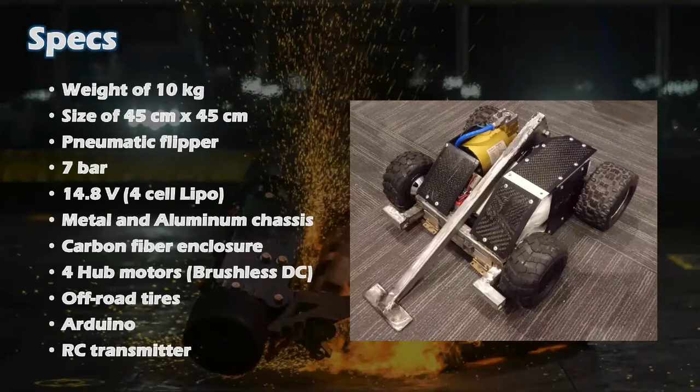Talking about the specs of this robot, the weight is 10 kilograms, following the rules and regulations in Sri Lanka. The size is also limited to 45 centimeters by 45 centimeters.

Then we used a pneumatic flipper with 7 bar of pressurized air. We used a 4-cell lithium polymer battery as our power source.

We use metal and aluminium to build the chassis. Then carbon fiber for the enclosure, actually carbon fiber and aluminium.

Other than brushed DC motors, we used hub motors, meaning brushless motors, for our drivetrain. Then we used off-road RC tires to get traction.

Simply, we use Arduino as our main controlling unit and an RC transmitter to control our battle robot.

This is the important part. The first step is to choose our components correctly.

We have rules and regulations that limit some specs of our components, and we have to maximize our performance within these boundaries. We have to carefully choose components that suit our battle robot.

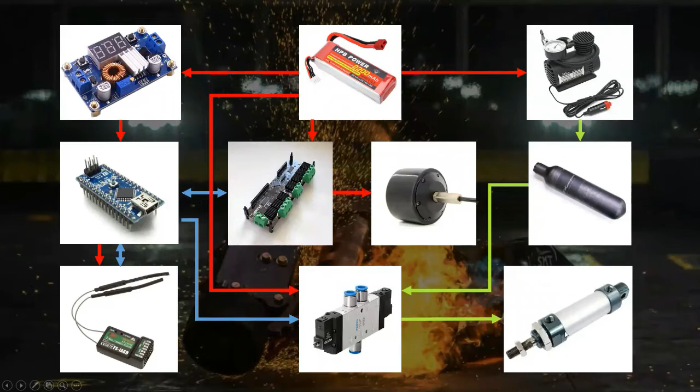So we have compressed air stored in the air container. If we do some flips, the air will be used up, so the number of flips we can get is limited by the air volume inside this air tank.

To overcome this problem, we add a small compressor inside our battle robot. So if the air pressure gets low in the air container, we can operate the air compressor and refill the container.

So we can get the number of flips that we want without limitation.

These are the basic electromechanical parts and connections in our battle robot. It's important to have this kind of overview because it makes it easy to design and develop our battle robot.

This is the first part: pick the right components and build this kind of overview about the electromechanical connections in our battle robot.

What is the next part? Actually, this is something like drawing, a conceptual design.

As a battle robot builder, we should know, at the end of the day, what we are going to build and how it looks. First, we don't need any CAD tool or graphic tool.

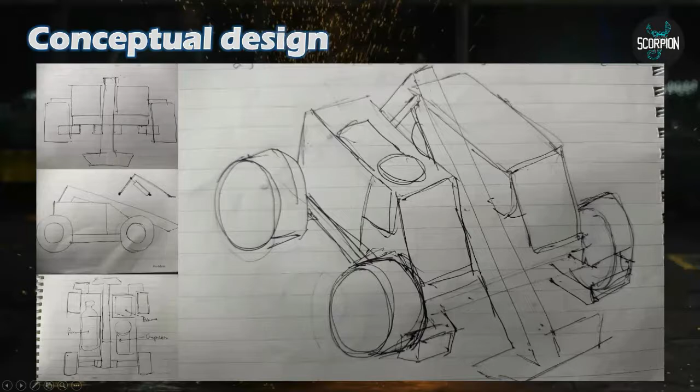Apart from the operation of the battle robot, we also have to think about its appearance. So conceptual design is a very important step of our battle robot building process, followed by 3D design with a CAD tool.

This step requires some knowledge about CAD tools. If you guys have that kind of knowledge, you can use SolidWorks, or there is a free, open source software called FreeCAD to develop this kind of 3D model of our battle robot.

I'm going to show the 3D model of my battle robot in SolidWorks. This is the 3D model that we have built. There are a lot of advantages of this step because we can accurately model our battle robot in this environment without building it. What are the advantages of that?

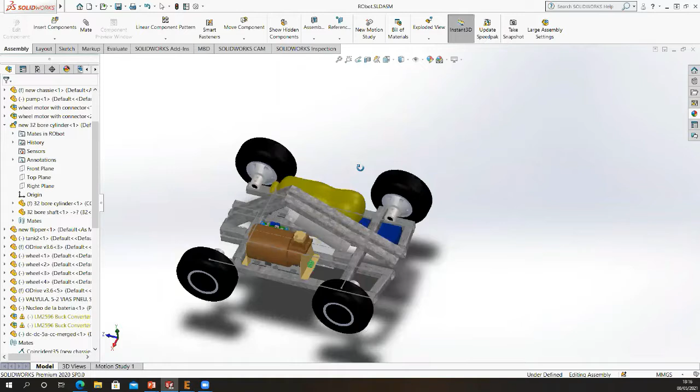The basic advantage is we can fit all the components within our boundaries, meaning within our size limitations. We have to build our robot within a 45 by 45 centimeter area, so initially we can mark that 45 by 45 centimeter square limit and place the components. That's a good advantage of this 3D modeling.

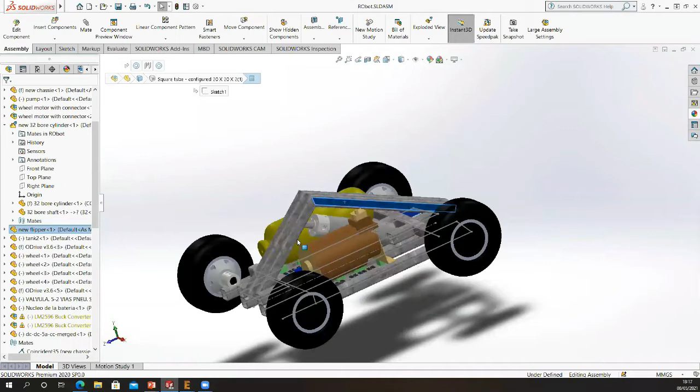Also, we can get an idea about how much material we need to build this robot. That means we can calculate the length of these metal bars, how much length we need to complete this design. That kind of measurement can be taken from these 3D models.

As the first step of the 3D model, I developed the base of the chassis. That means all the parts inside the battle robot are mounted on this base - hub motors, the compressor, air container, weapon, and other electronics are mounted on this base. So first I designed this base part.

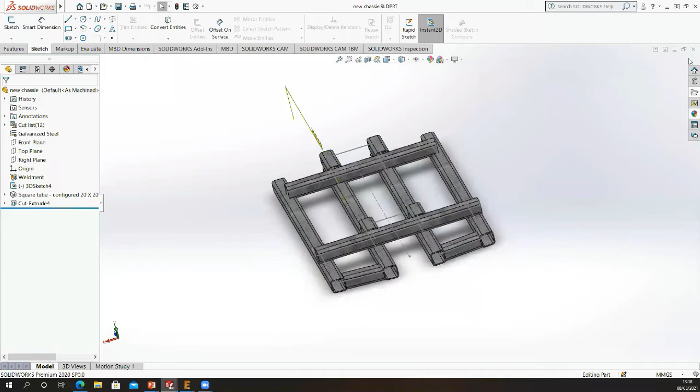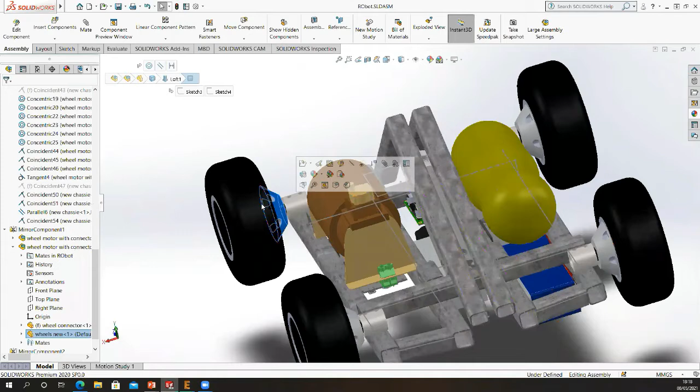Then I placed other components on top of this base part. You guys can think, do we need to build all these parts on our own? No, actually there are third-party sites where you can download some 3D models - models of motors, hub motors, wheels, compressors, some standard electronics circuits, and batteries can be directly downloaded from those third-party websites.

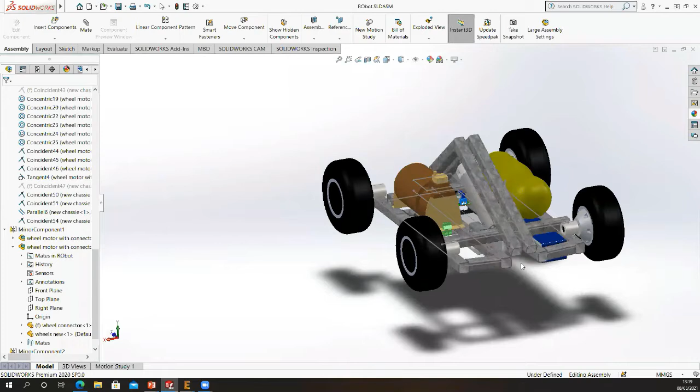In here you guys can see I placed all my basic components on this 3D model. Then I can get a good idea about how to plan the enclosure of this battle robot. Without this kind of 3D model, we'd have to think about the enclosure after physically fitting all these components. But the advantage of 3D modeling is we can plan that enclosure in this environment and virtually see how our battle robot is going to look with these components.

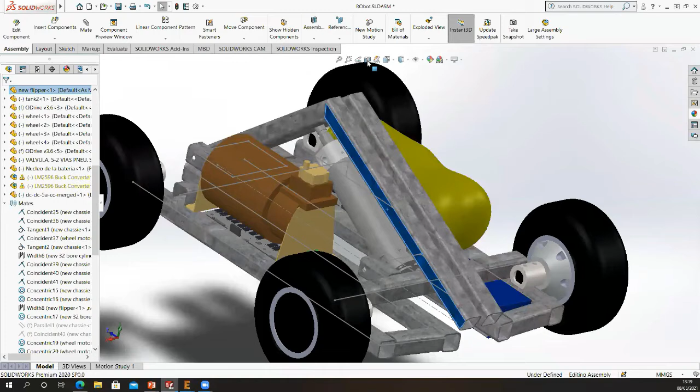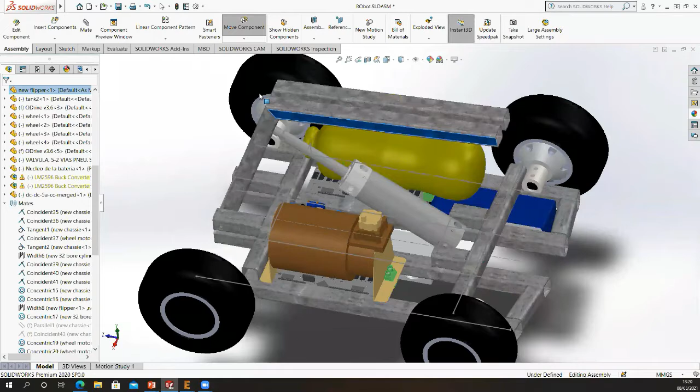Also, the other important part is we can move components like this. This is actually not the completed weapon - there's some part in front of it, but that's not very important. Then we can move our weapon and see if any components collide with my weapon's path. That's also very important, because after physically placing all these components, if the weapon collides with some critical parts when moving, it's not going to be good. So we can initially check if any component collides with my weapon. That's a very good advantage of this 3D modeling.

I think you guys will get the importance of this 3D modeling. You can learn about this 3D modeling yourself - there are a lot of tutorials, and we can also help you learn these kinds of tools. Okay, this is about the 3D modeling and its importance. What is the next step?

Next step is we have to check that our weapon system is working correctly. That means we can choose any weapon you like - if it's a spinning drum, a vertical spinner, a horizontal spinner, a lifter, or it could be a flamethrower, but we can't use flamethrowers here. As I mentioned in the previous session, in Sri Lanka the most effective weapons are lifters and flippers, given the limitation of weight and size.

So we decided to go with the pneumatic flipper, and we tested the operation of that pneumatic flipper. Initially we didn't use 7 bar, we used only 4 bar. We thought it would give a good result. This was tested with 4 bar, but it's actually not enough, so we decided to increase our pressure.

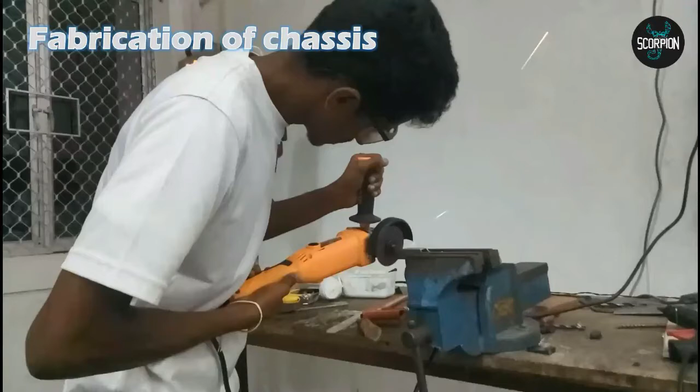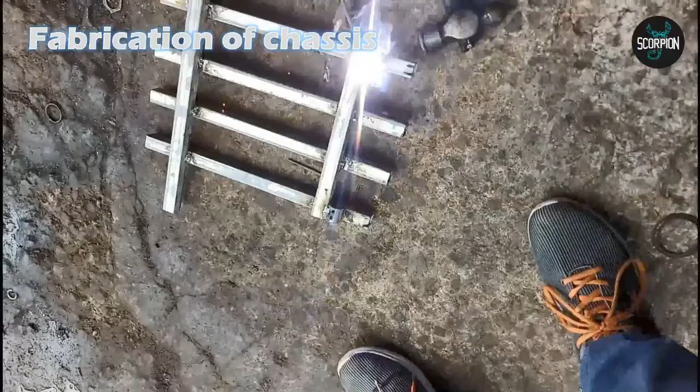Then, other thing is the fabrication of the chassis. Next thing is fabrication of our chassis. We use metal box bars to build our chassis, because we are using a pneumatic flipper, so a lot of impacts can be coming out from the flipper, so we have to build the robot very durably.

So we use metal box bars and cut those metal box bars to the accurate length. The length is taken from the 3D model, that is the importance of the 3D model. We can get the correct length measurements and correct placing of all components. We take those measurements from the 3D model, then build the chassis. We have to use cutting tools, welding tools, and drilling tools to build the chassis. That depends on the material and the method of fabrication of the chassis.

What are the tools we require in this step? I'm going to talk about the tools that you need for the fabrication of your chassis. Basically, all robot builders tend to use aluminum or metal to build their chassis. That's a good idea, because we have to make a durable robot that the opponent cannot damage.

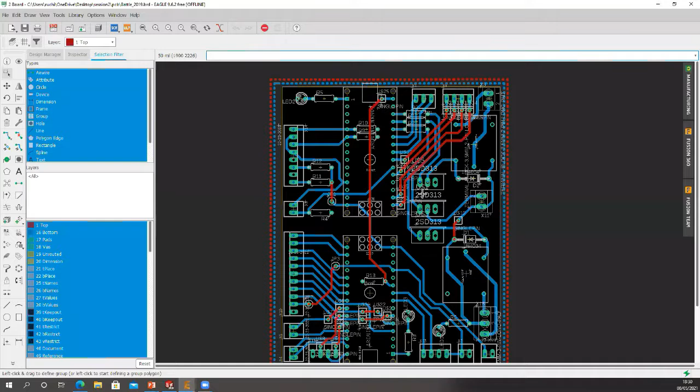This is the PCB design we have done. We use the EagleCAD designing software. There are a lot of PCB design softwares around the world. In EagleCAD there is also a free version, but it has certain limits. But there is KiCad, that's a totally free edition. Then there are a lot of PCB editing tools like Altium, OrCAD, EasyEDA, something like that.

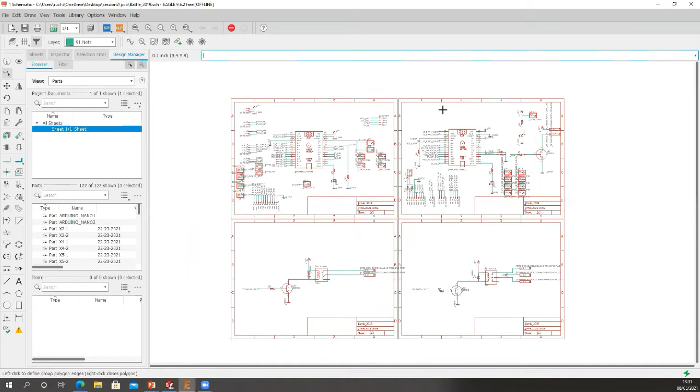You can use any software tool. The basic idea of the software tools is the same on every platform, and you can practice them and design this kind of PCB to use as our main control unit. And you can use this PCB in future for other robots also.

Then you can fabricate this PCB with the etching process at home with your hands-on experience, or you can use JLC PCB or PCB Way. There are a lot of PCB manufacturers in China. It's not very expensive - you can get their service to have a good PCB with your battle robot. That's about the PCB design.

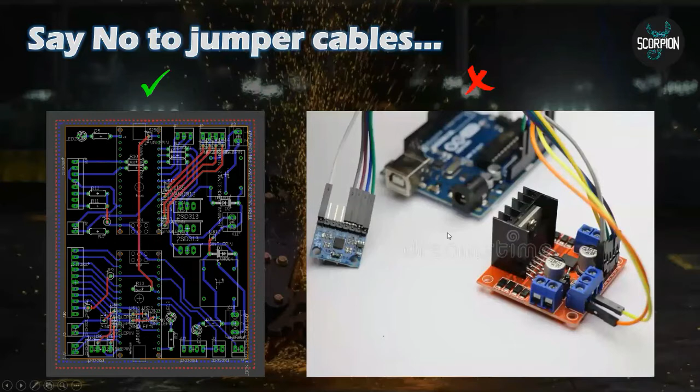I mentioned that previously - this also can be done like this, meaning we can just connect jumpers with Arduino to the motor controller or any other electrical device. But the problem is, if our robot gets a huge impact from another robot's weapon, sometimes this connection can be lost, because these jumpers haven't any lock-in mechanism. But with our PCB, we can include lock-in connectors, so the connection is good. Whether we had a huge impact or not, the connection is secure. This is the importance of having a PCB like that.

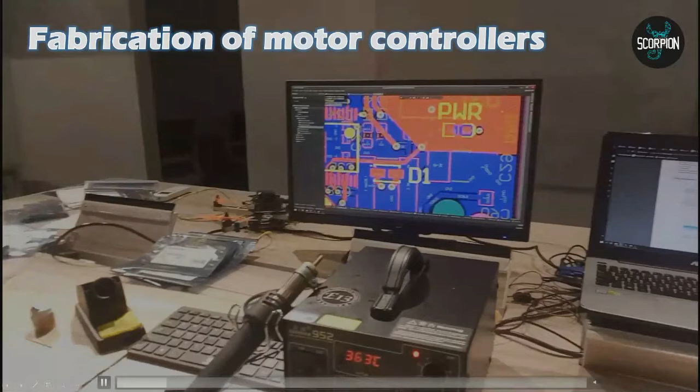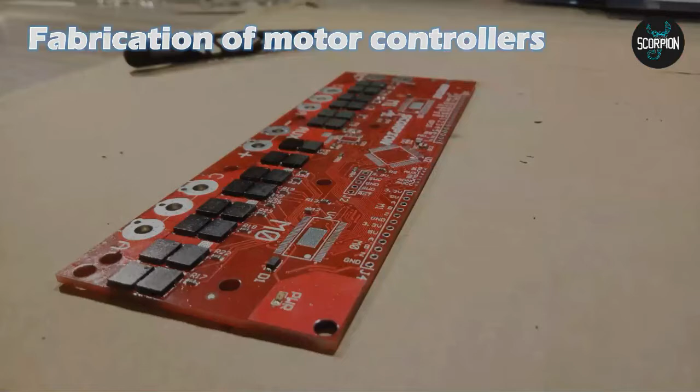This is about the main controller PCB. Then actually in this design we fabricate the motor controller also. Actually, we can buy a motor controller from a shop and use it with our battle robot, but what we have done here is get an open source design and edit it in a certain way to fit our requirements. Then we sent the design to China, fabricated it, and soldered it here with our tools.

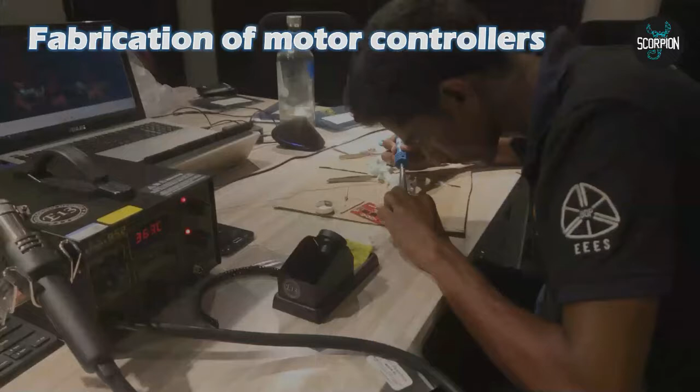Actually, this is a good experience - soldering a PCB is a good experience. It needs patience and a lot of things. Then this is that PCB. Actually, this is a dual motor drive ESC. This has encoder feedback.

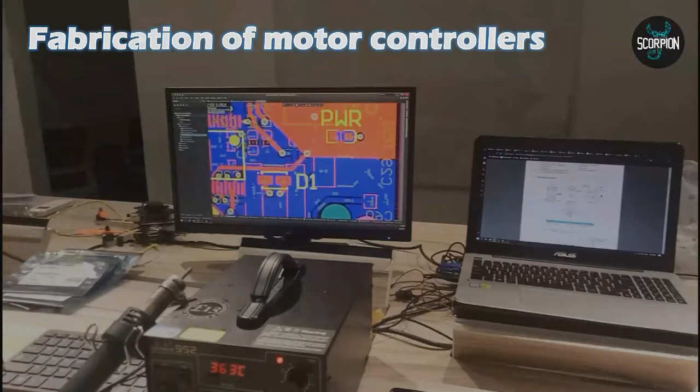As I mentioned before, we used hub motors and not DC brushed motors. So to maintain the torque and drive correctly, we need to get the encoder reading as well. Because of that, we use this closed loop motor controller. This is the fabrication of that motor controller in our labs.

But don't think you guys also need to fabricate the motor controller on your own - that's not a much needed step. You can just buy a motor controller and use it with your battle robot. In Sri Lanka also there are a lot of online stores now available, so you can just order the motor drivers and use them.

This is the testing of the motor controllers. Since these are soldered with our hands, we have to test it. We send some USB commands and test our hub motors with this motor controller. Actually, it's successful.

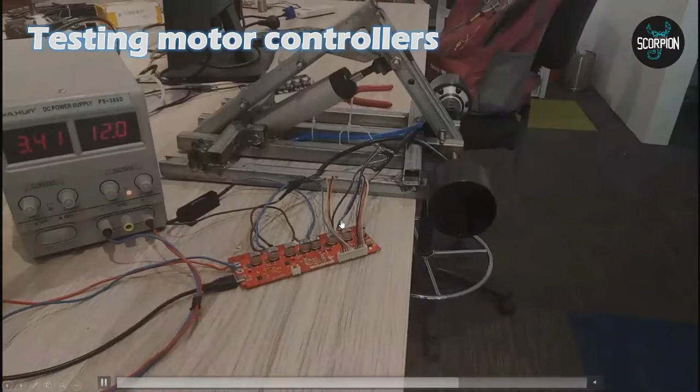And I have to share some experience about these hub motor controllers. Actually, as I mentioned before, to control these hub motors, these motor controllers take the encoder values of the motor. The motor manufacturers place some encoders inside the motor and give some wires to connect the motor controller. So there can be some problem with noise in these encoder lines. This happens a lot. In a lot of forums, a lot of developers are saying that encoder noise happens there.

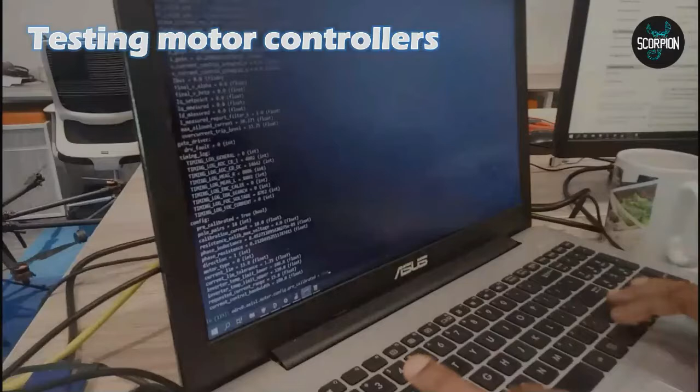If you guys also face that kind of problem, you can simply add some picofarad range capacitors between each encoder line and the ground. That will solve the encoder noise problems in these kinds of closed loop motor drivers. This is a practical scenario, because the encoder wires are coming together with the high power motor wires, so there can be some noise added to the encoder line, so we have to filter it out. That's a practical scenario we have experienced in this design.

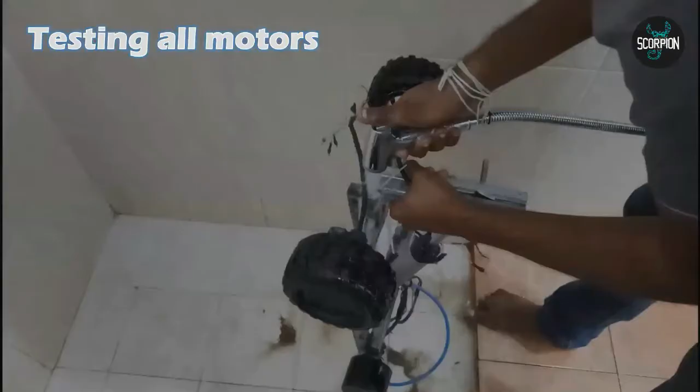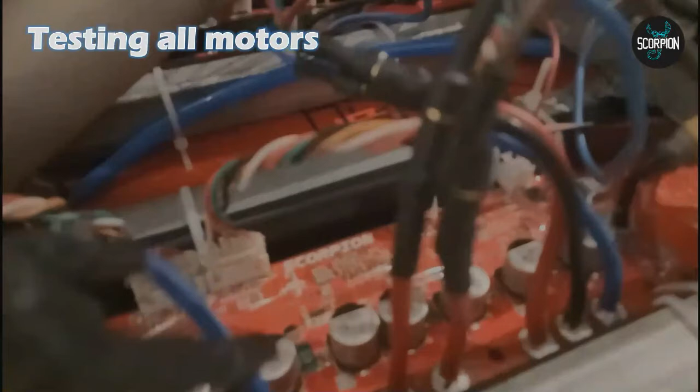Then we tested all motors with the motor drivers we built. Actually, initially you guys can see the acceleration. We couldn't control the robot well, so it's out of control and going through a mud area. The mud is all over the robot. Then we washed the robot to remove the mud. That's the importance of these hub motors. Initially, it can get huge acceleration. So your driving skills should be at a high level to control this kind of motor.

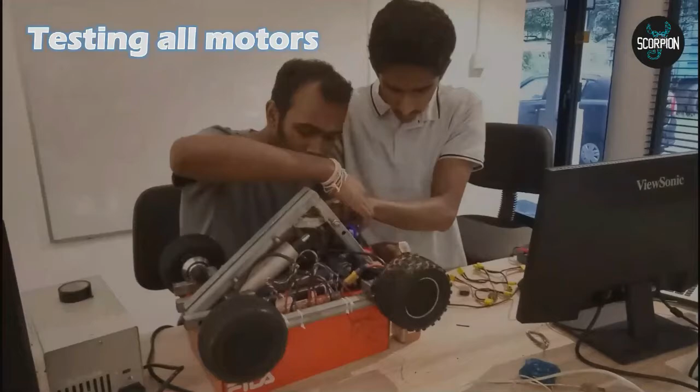This is also a test of our motors with our motor driver. You can see the acceleration. Actually, these motors don't have any gearbox, but with the closed loop control of the motor driver, this can get huge acceleration and huge torque. You can see this is not a fast forward video. You can see the acceleration of the robot.

Actually, in the competition also, a lot of participants cannot even think about that acceleration. Just start the countdown, and within a second, our robot is near the opponent robot. So that's the main advantage of these brushless motors. They can get a huge acceleration.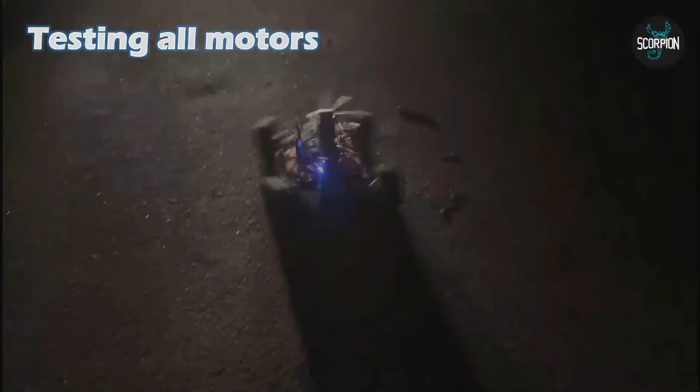These are some outdoor tests. Actually, the hub motors initially came with a very hard rubber covering, so it's not good for traction. So we got RC tires, removed the rims of the RC tires, and connected the hub motors with these RC tires. That's about the motor testing.

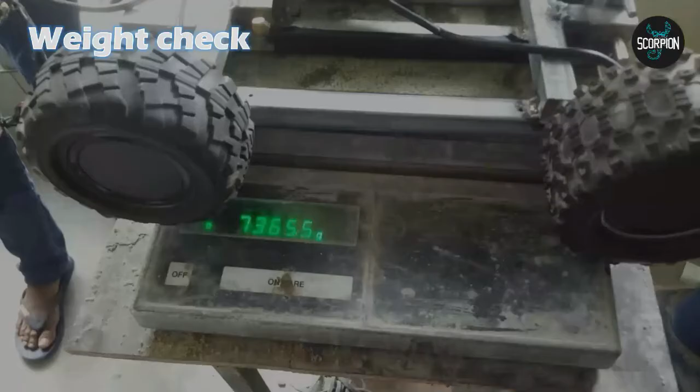Then the weight check. This is a very important thing because we have to limit our robot to 10 kilograms. That's the weight limitation of our robot. So we measured the weight of every part of our robot: the chassis, motors, motor drivers, electronic parts, solenoid valve, piston, weapon, every part. Then finally, the total was much higher than 10 kilograms. If we went with this weight, our robot would definitely be disqualified. So we had to reduce some weight. So we removed some metal parts and made some changes to our robot chassis and robot weapon.

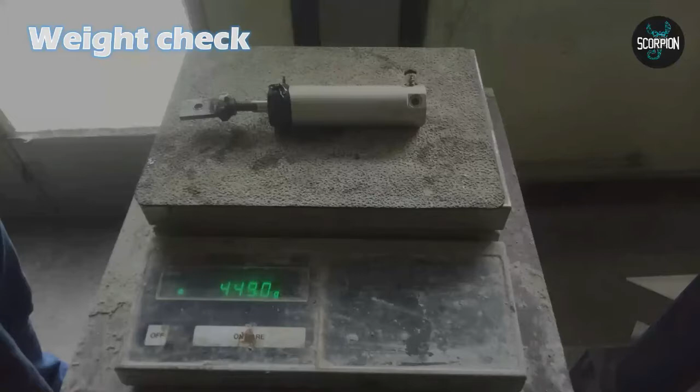Actually, that is the next part we have done. This is a very important part, the weight check. If you are building a battle robot, at every stage you have to measure the weight of your battle robot. If the weight is higher than the limit, you have to remove some parts of your robot. So think about that.

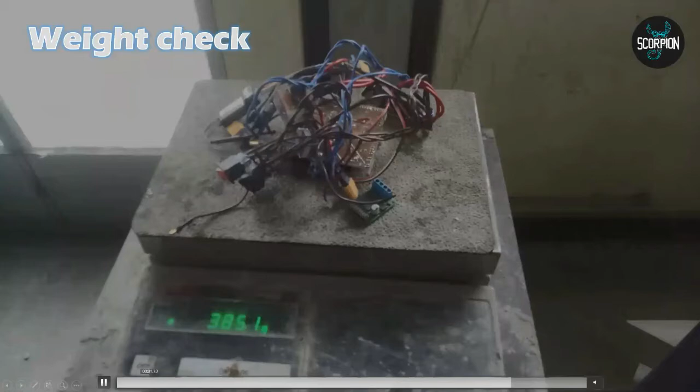Then the next part is the adjustment of the chassis and the weapon to make the battle robot lighter. So we removed some metal bars here and added aluminium bars for those parts. So finally, we were able to make it within 10 kilograms. And for the weapon also, initially we used 2 bars. Then we decided to go with 1 bar and a long weapon. So that also reduced some weight.

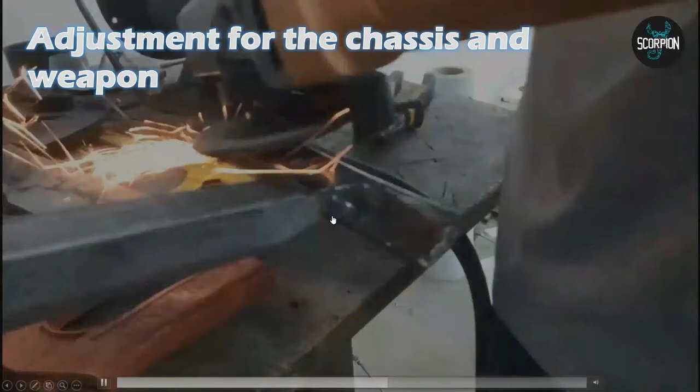Here also we used a welding shield to protect our eyes when we are welding. This is our weapon tip. We made it very sharp to get underneath the opponent robot. We need very little ground clearance to get underneath the opponent robot. So we sharpened this weapon tip as much as we can.

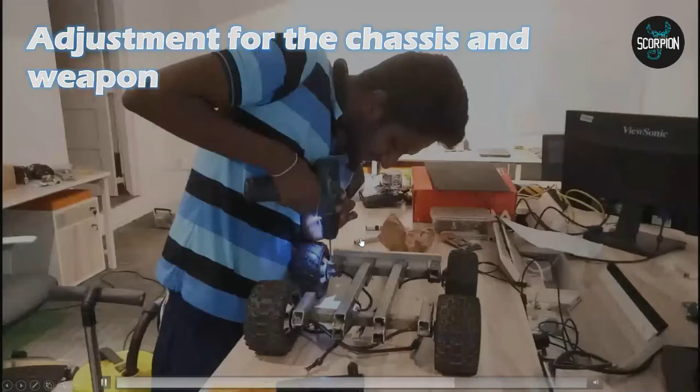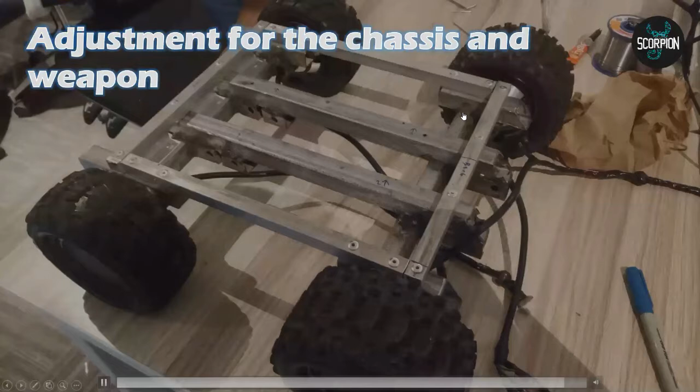Then, as I said, we removed some metal bars and added some aluminium bars in place of those metal bars. These are the aluminium frames that we added instead of the metal bars. Those are the adjustments we have done.

Then we measured all parts of our battle robot. It came to 9.149 kilograms. This is actually without the enclosure. So we have very limited weight to allocate to the enclosure. Because of that, we moved to carbon fiber, because carbon fiber is a very light and hard material. So we moved to carbon fiber because of this weight limitation.

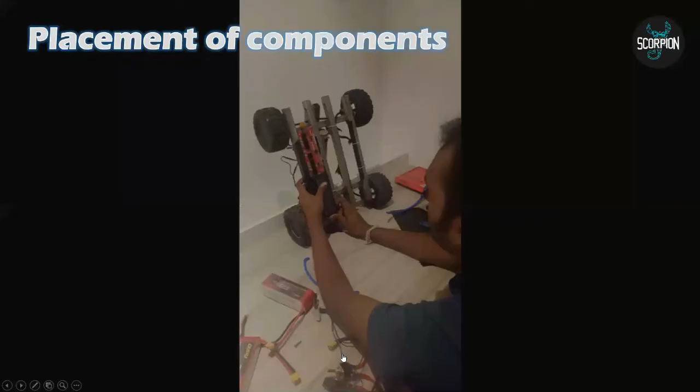Then the next step is the placement of our components. First we have placed the motors and wheels. Then we place the weapon. This is the air container. It has to be protected very well, because it contains 7 bar pressurized air, compressed air.

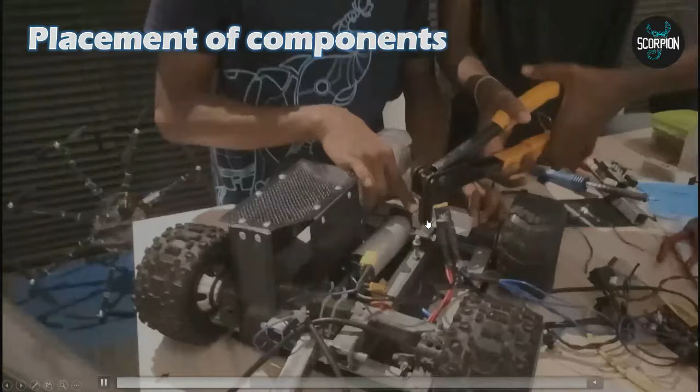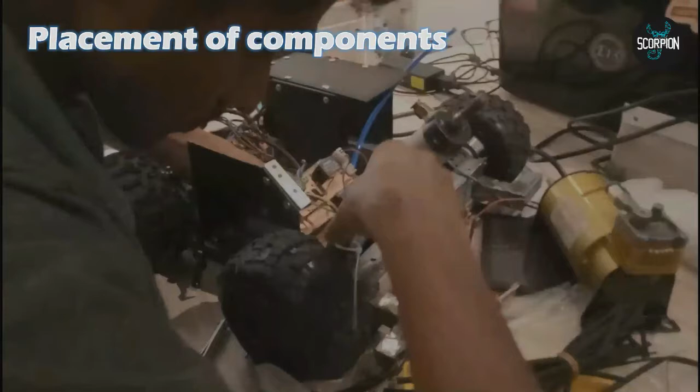Then these are our pneumatic air lines, so these also have to be placed nicely. In this step, the neatness of your work is very important, because in a battle robot there are signal lines, there are power wires, and in our design there are pneumatic air lines. If you place those lines, components and wires very neatly, you can easily find out if there is any error, bug or damaged component. So in this step, your neatness of work is very important.

This is the main controller PCB placement. This PCB was made here with the PCB milling machine. This is the placement of the main controller. Then the enclosure; this enclosure we made with carbon fiber.

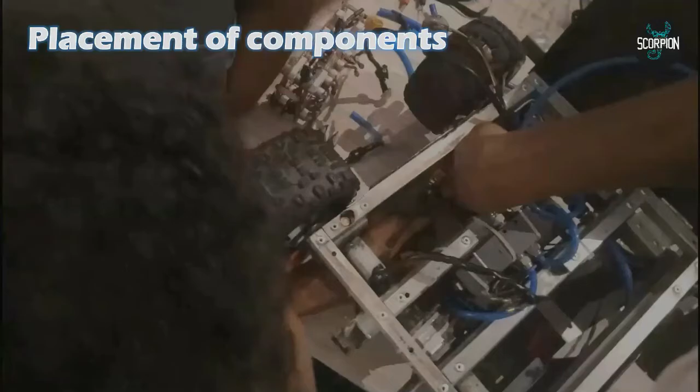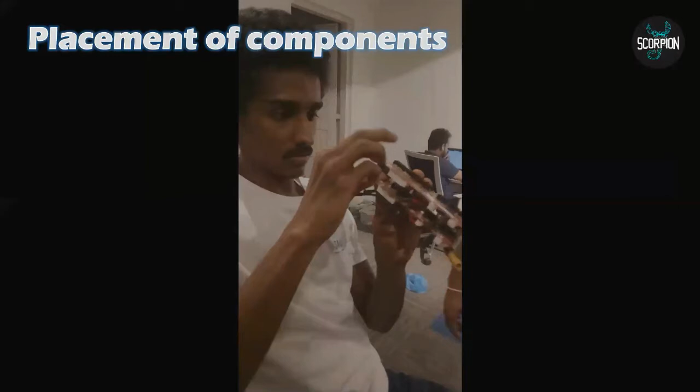When talking about the enclosure, you have to think about 2 things. First, you have to protect your critical components with the enclosure. That's the main idea of the enclosure. The other thing is you have to be able to remove any part of the enclosure easily to access the electronic or mechanical components inside the battle bot. Why? Because if some component gets damaged during battle time, we have to replace it, so we have to be able to remove part of our enclosure easily and access that component.

Then we can replace that component with a new one. That should be kept in mind also. For that purpose, we used this kind of enclosure, where the bottom side can easily open. Then we can access any electronic or mechanical part through this open area. That's about the enclosure and placement of the robot. Then the electrical wiring, which is also a part of placing the components.

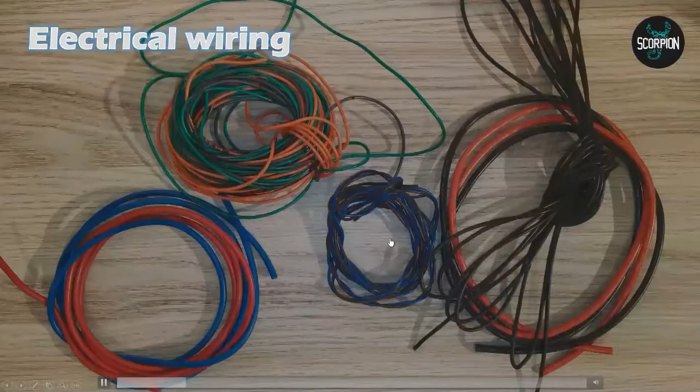Here also, as I mentioned before, you have to choose correct wires and solder them properly, because in battle time we get a lot of hits and impacts from other robots. So our soldering joints have to be perfect. These are the wires that we can see in the market: very cheap twisted wires, silicon wires, and

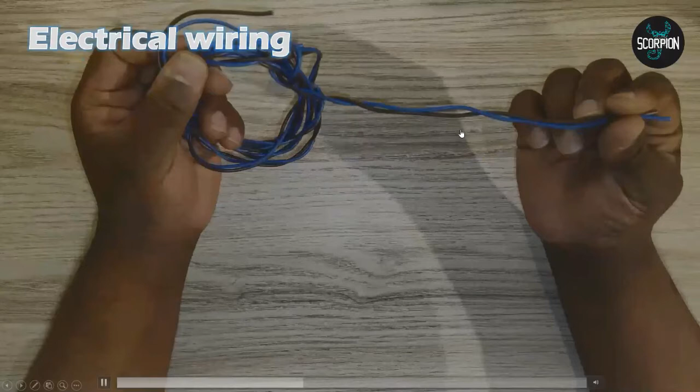auto wires. These twisted wires are okay for transmitting very low power, but using them to power up our motors, motor drivers or weapon is not a good idea, because this wire has a very limited number of cores, so we can transmit only very limited current.

But with these auto wires, we can select many sizes and many colors, so we can use wire with a large number of cores to transmit power to our motors or weapons. So it's good to use these auto wires rather than the cheap twisted wires shown previously.

We can also use silicon wires, which are available in many sizes, but the problem is in Sri Lanka we cannot find every size that we want. So a good solution is auto wires, because they're made for the automobile industry. They're very heat resistant, so they're good for transmitting power in our battle robot design.

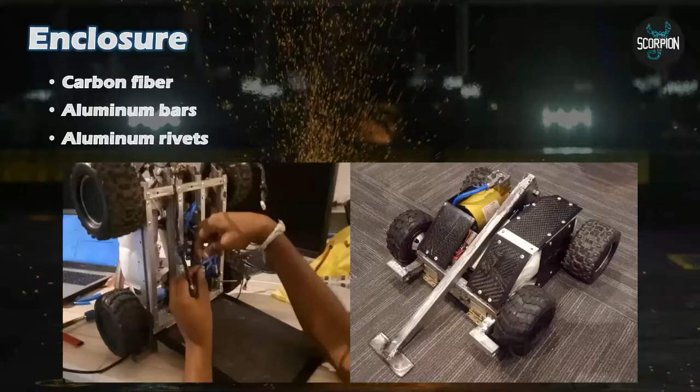This is the enclosure. As I mentioned before, we used carbon fiber, aluminum bars and aluminum rivets to make the enclosure. These are carbon plates, around 2 millimeters thick, not very thick, but very hard. They protect our critical and electronic components, which is the basic need of the enclosure.

And as I mentioned before, the bottom part of our enclosure is designed to be easily removed to access every electronic and mechanical component inside the battle robot. These are the main concerns you have to think about when building the enclosure. If you can't find carbon fiber, you can simply use aluminum plates with different thicknesses.

It's also good because aluminum is also a lightweight material, and its hardness is at a considerable level, so you can also use aluminum. So, why are we not using a heavy metal for this enclosure?

Because we have to allocate our weight more to our weapon, chassis and drivetrain, because those are the main parts. Your robot has to move quickly, the robot's drivetrain has to have a lot of torque, and your weapon has to be very dangerous. So you have to allocate every weight for those systems. So it's good to have lightweight material for the enclosure design because of that.

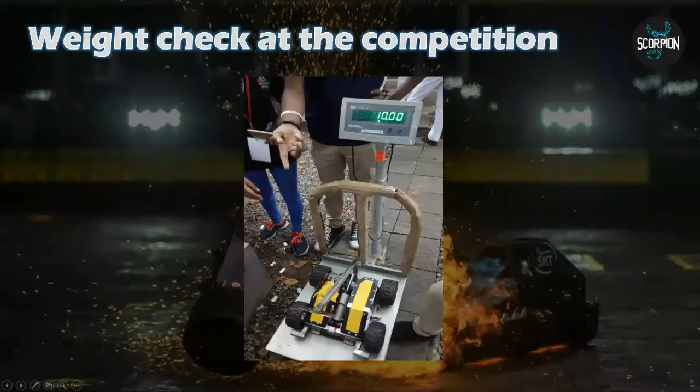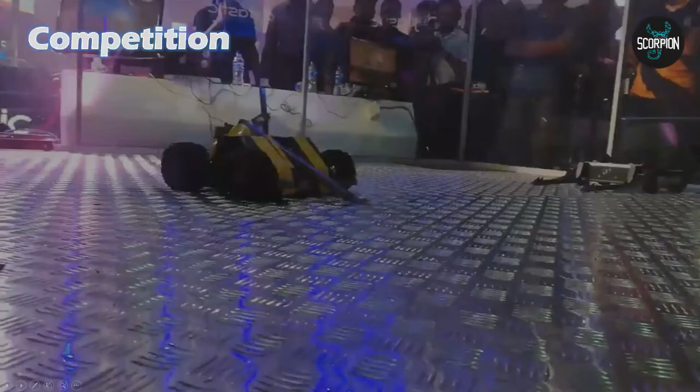Actually, this is the competition day. It's tied to the 10 kilograms, so it's okay. We qualified our robot, and this is the result of this pneumatic flipper. It actually worked very well. The robot is fast. The flipping is fast. This is the first time pneumatic flippers and hub motors were used in a drivetrain. So we made a difference, and it worked very well.

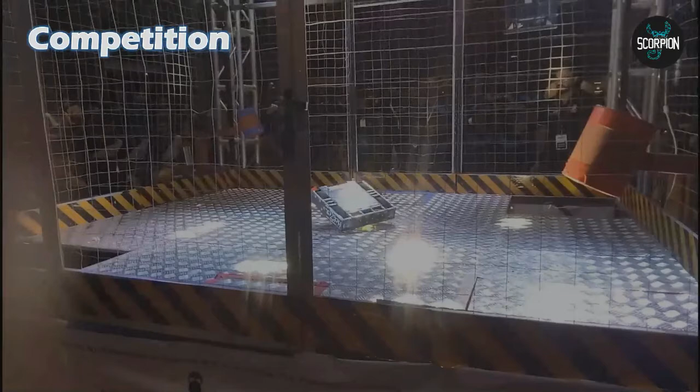You guys should also think about doing a different thing. Using brushed motors for the drivetrain is okay, because we can easily find brushed motors on the market. But try to add a new weapon, or try to use a combination of weapons. A lot of bot builders are going to build just a wedge bot. That means there is no active weapon, just a battle robot with a ramp. The idea is to push the opponent robot and win the match. But it's not an interesting way to win a match.

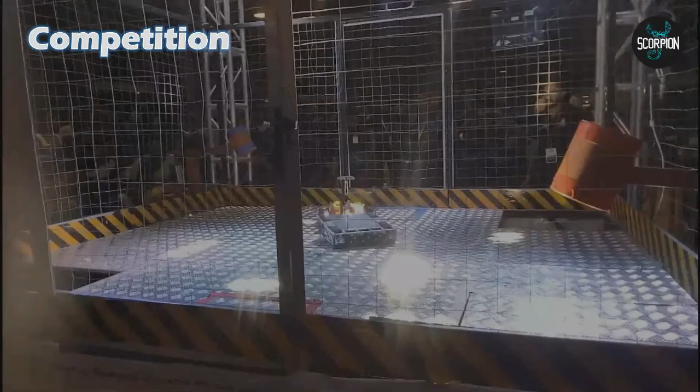So you can try a new weapon in every battle bot competition and see whether it's working or not, and make improvements to the weapon and drivetrain. Then this robot building task actually gets very interesting.

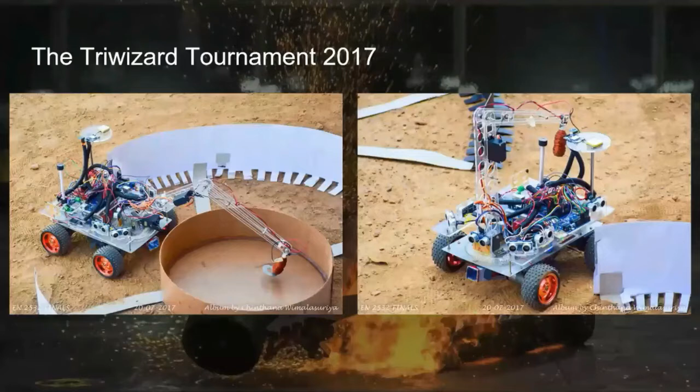Before going into the BattleBot implementation sessions, let me give you some insights into the other robotics competitions happening in Sri Lanka, so you can have knowledge about them, apply to those, compete and have fun. I have chosen 5 different robotics competitions that I competed in during my university life. This is the first one, my first robotics experience.

The Triwizard Tournament 2017, organized by the Department of Electronics and Telecommunication Engineering, University of Moratuwa. It's kind of an interdepartment robotics competition. The task was held outside. The task was to navigate from an initial location to the destination, placed 50 meters away, using GPS. There were two cardboard walls there, one white and the other black.

There's a color sensor placed in front of the robot, as you can see in this picture, which differentiates the black and white walls. Then the robot had to follow the wall to find this cutout to enter the area where the metal ring is placed inside this basket. Once inside, the robot could use this manipulator with an electromagnetic end effector to grab the metal ring. So that was the task.

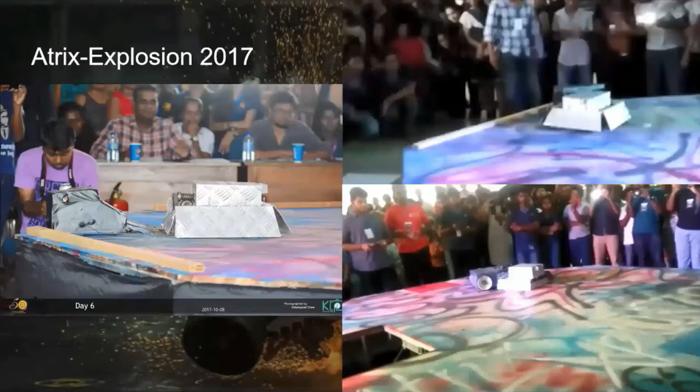And this kind of open arena BattleBot competition is really dangerous. Nowadays, all BattleBot arenas are covered with metal meshes, or at least have a fence to avoid harms for the drivers and the viewers as well.

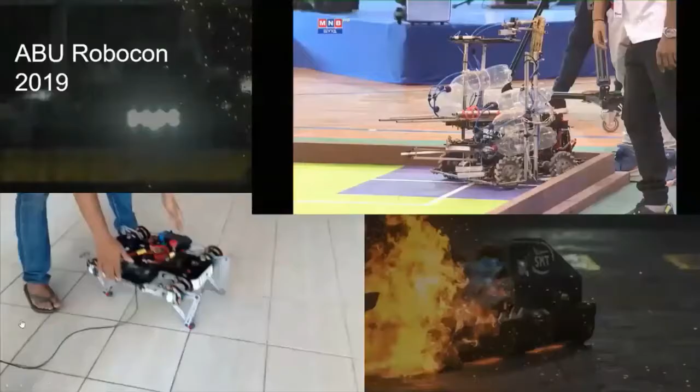ABU Robocon 2019 was held in Mongolia. I got the opportunity to participate for Sri Lanka in an international event. For the competition, we had to build two robots. The first one is a manual wheeled robot, and the second one was an autonomous legged robot. For the autonomous legged robot, we used BLDC motors, brushless DC motors, as you can see in this video.

The task was to carry an object which has some message in it called Gerege. As you can see in this video, this is the message written Gerege that I was talking about. And the manual robot has to pass it to the legged autonomous robot. Afterwards, the manual robot had to shoot some objects called Shagai. The way the Shagai are shot gives points to our team. After collecting enough points, the legged robot can start climbing the ramp. The first team to finish the whole task is named as the winner of each battle.

In this competition, we couldn't win even a single game because of the technical difficulties we faced on the actual competition day. Also, I wasn't able to visit Mongolia to participate in this event, but I was working in the team at the time.

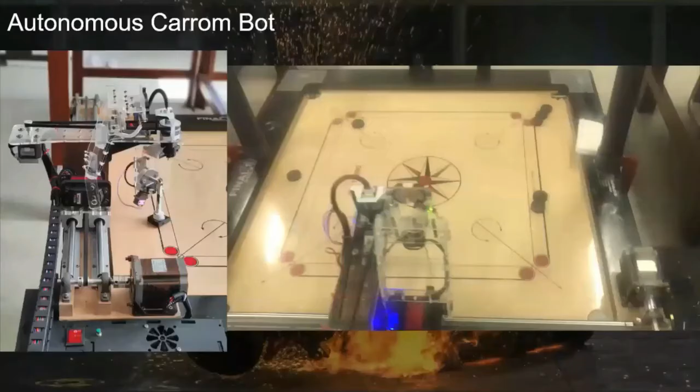Okay, guys. What I have to demonstrate next is the most interesting project that I have ever done in robotics. This autonomous carrom bot we built as a team of 4 as our final year project. It plays a series of best possible shots to win a game. The manipulator shown in this picture has 4 degree of freedom motions, so it can place the disc by itself and play 360 shots as well. Thumbing shots are available in carrom, so the robot can play those kinds of shots as well.

Also, we have programmed this robot to play against a human opponent. We played several games with human opponents as well. In this video, you can see how the robot is capable of executing a series of shots in order to pocket all the available pieces on the board. It can even decluster clusters on the board and play the shots according to those clusters as well.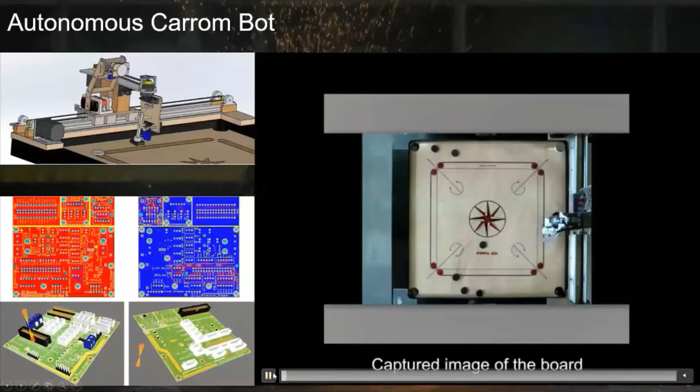So guys, let me demonstrate how this robot works. There is a camera placed on top of the board, so the camera can capture this image of the board. Actually, this image is captured using that camera. So this is the input to the system. This is how the system shows the board. And after running some image processing techniques, we can extract the locations of pieces and edges of the board and pockets as well. There we define a 2D XY coordinate plane on top of the board, so we can calculate XY coordinates of each piece and pockets as well.

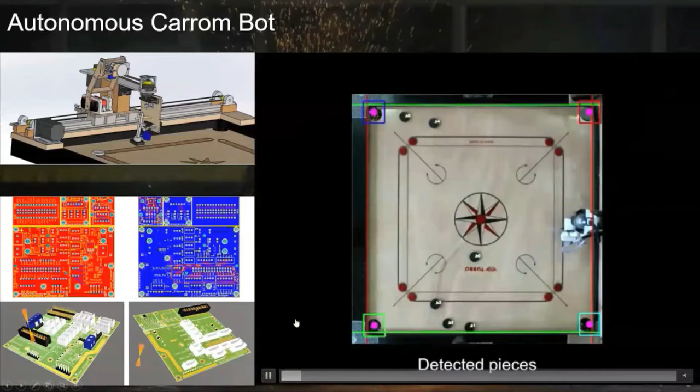For the implementation of this robot, this is the 3D model of the robot, and these are some of the PCBs that we made during this project. And we won second place in the IAS Industry Application Society IEEE International Robotics Competition in 2020, held in

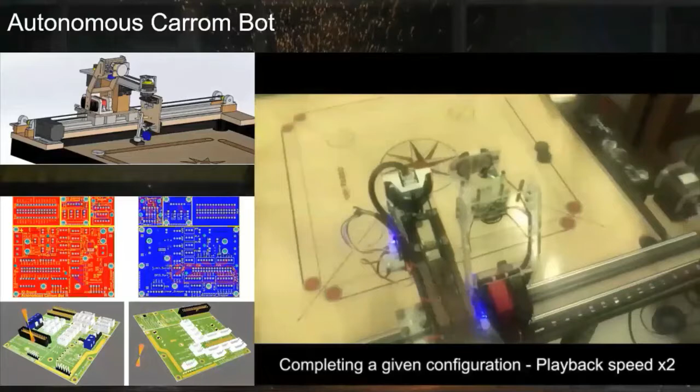So the reason behind showing this project is for you guys to understand what are the possible areas that we can address using the knowledge that we have gathered from this series of sessions. After following this series of sessions, you will be able to know what applications we can

address using robotics, machine learning, AI, AR, those kind of things. So this is not only limited to BattleBot. You can use this knowledge to solve any robotics related problem you're facing in your day-to-day lives.

During the last session, we promised you that we will talk about best practices to maintain while building a BattleBot. So let's start with protection. When it comes to protection, there are several major components that we have to intensively think about. Those are the battery, wheels, motors, the control circuit we are using, the RF receiver, and finally the cutoff or kill switch.

Starting from the battery, if you guys can remember the last session, we summarized that in most cases we are using either a lithium polymer or a lithium ion battery as our main power source when building a BattleBot. So those two types of batteries need intensive care when handling.

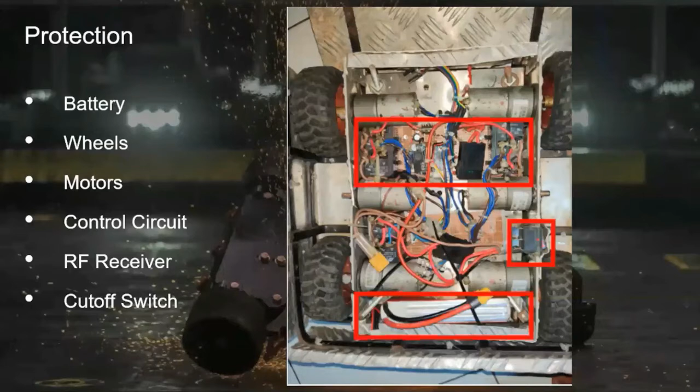While providing this high current, the battery may get heated. To make sure this doesn't cause harm, it is better if you can mount the battery near the enclosure, so the battery can dissipate its heat to the metal enclosure, and the temperature rise may not harm the battery.

The most important part when it comes to batteries is to avoid physical damage. If a weapon or a sharp object hits the battery, a lithium polymer or lithium ion battery can explode or catch fire. So it is better to avoid such scenarios.

As you can see in this figure, these are the fuses we used to avoid overcurrent. And here is our lithium polymer battery. As you can see, the battery is fully covered with a metal enclosure, with two layers of metal enclosures covering it, so no harm can be done to the battery by the opponent's weapon. Those are the main points regarding protection of the battery.

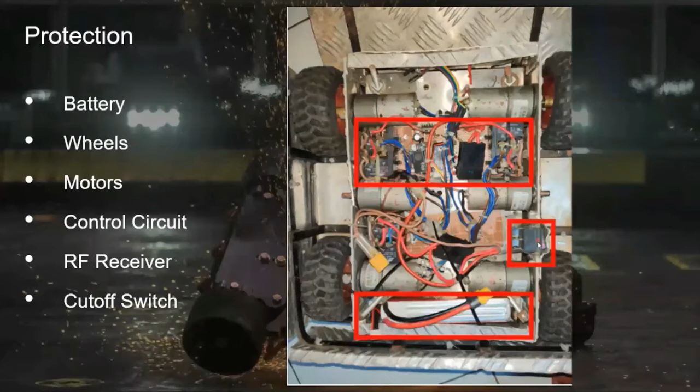So this is one of the BattleBots made considering all the best practices and protection mechanisms discussed earlier in these sessions, also the methods discussed by my friend Richard. As you can see in this picture, you can identify how hard the chassis is made to make it a strong robot that the opponent cannot harm easily. The metal chassis is made out of steel bars and white iron steel plates.

In this figure, you can identify the RF receiver antenna coming out of the metal enclosure, to avoid any signal interference that can be caused by placing the antenna inside the metal enclosure. So as discussed earlier, it is better to keep this antenna out of the metal enclosure to avoid such signal interference.

This is the complete BattleBot with its enclosure. The enclosure is made out of aluminum and steel, so it is really hard for the opponent robot to puncture this enclosure and harm the components inside.

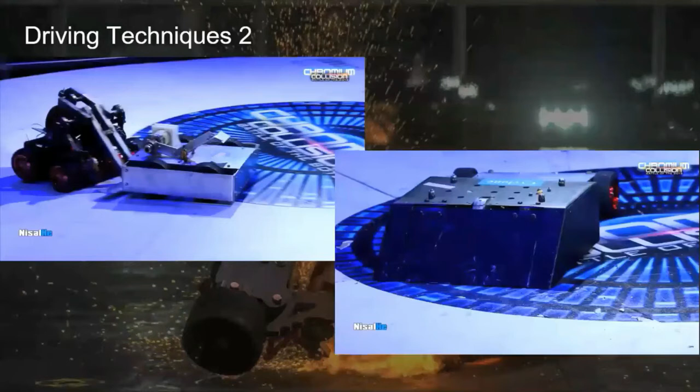Also, for this type of opponent robot, if you're facing one with a spinning weapon like a spinning drum, it is better to attack the robot as early as possible, because at the start of the battle these discs or spinning weapons aren't moving yet. So right after the start signal, we can attack before they power up these spinning drums or weapons.

It takes much time for the weapon to build up inertia while rotating, so it is better to attack this kind of robot as early as possible, before it gains the inertia of its rotating weapon. Otherwise, the impact will be huge and our robot won't be able to tolerate that impact. As you can see in this video, I was trying to attack this robot as early as possible, so the spinning drum couldn't turn at higher speed and build up a lot of inertia.

At this time, the weapon is starting, so there was no impact at all on my robot from that weapon.

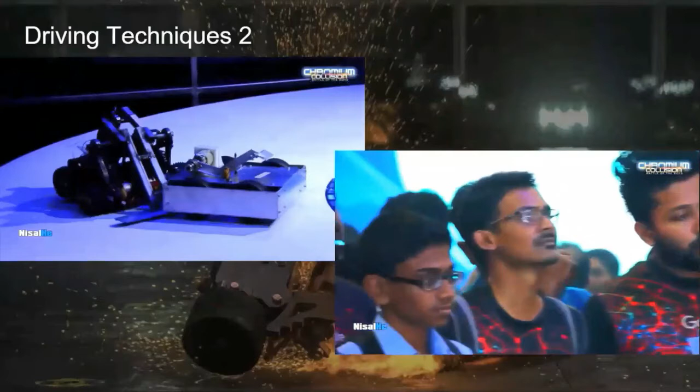In this technique, you can identify those two winning robots trying to attack the opponent robot from the rear side. To use this driving technique, you need extremely good practice in driving and operating your robot, because in the middle of the arena your robot will turn into different orientations rather than what you have practiced. So it's better to get practiced before competing.

Competing in the BattleBot, because this kind of driving technique can really work in your favor if you have practiced driving your robot very well.

Also, these videos I got from YouTube - there are a lot of this kind of resources on YouTube as well. These battles were from Chromium Collision 2017. There are also international competition videos, so you can visit there and watch.

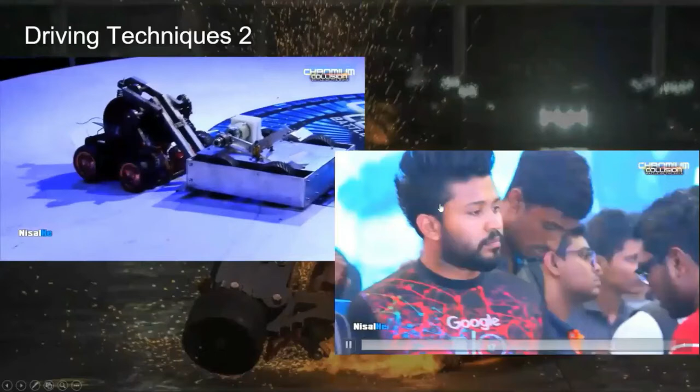My advice is to pay attention to the driving techniques rather than the robot weapons, because that is what matters when it comes to the battlebot arena.

In the last set of videos, I was trying to explain how practicing improves your driving and helps you win competitions in the battlebot arena.

In this set of videos, let's have a look at how lack of practice results in disasters.

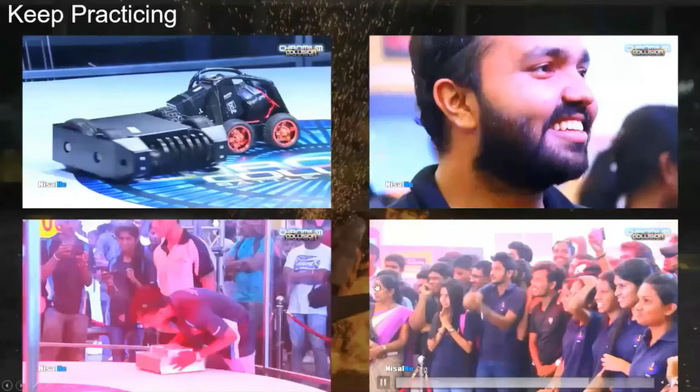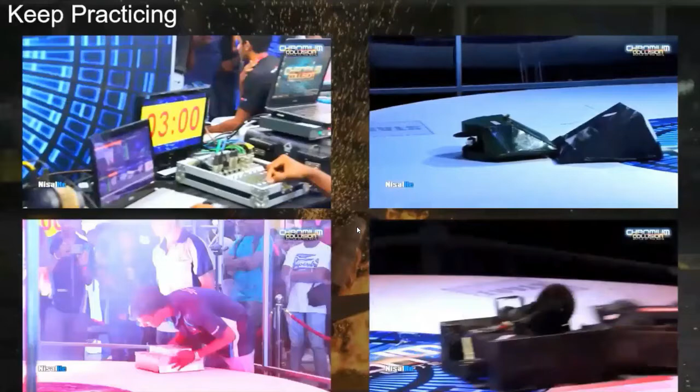In each of these battles, see the robot getting out of the arena by itself, which results in losing the match. This can be caused by two reasons. The first and most common one is lack of practicing. Look at this robot - it's going out of the arena by itself due to lack of practicing driving.

The other reason is signal interference. In this robot, you can see it's not actual driving out of the arena, but the robot itself driving out on its own.

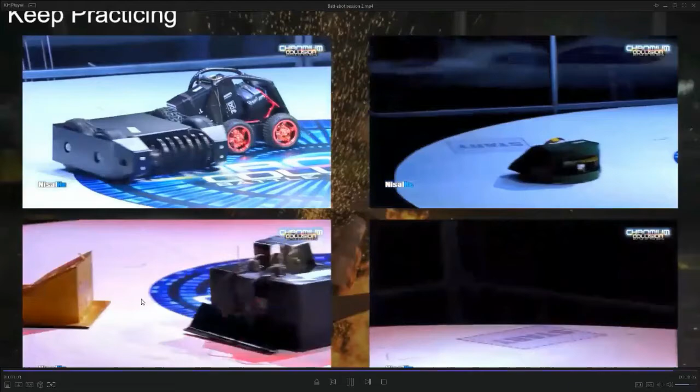In the last session, we discussed how to avoid this kind of behavior using fail-safe mechanisms. If the receiver doesn't receive any signal from the transmitter, we can program the robot to do a certain task, like holding its position. Otherwise it will result in these kinds of disasters.

So it's better to keep practicing, because you have to invest all your money, effort and time into building these robots. Remember, all of these videos came from a single 9-minute clip, so think how many of these kinds of disasters are happening in the BattleBot world.

So the most important part of BattleBot is to make your robot ready even 2 weeks ahead of the competition, and keep practicing for those 2 weeks. Otherwise, you don't even know if your robot is performing well or not.

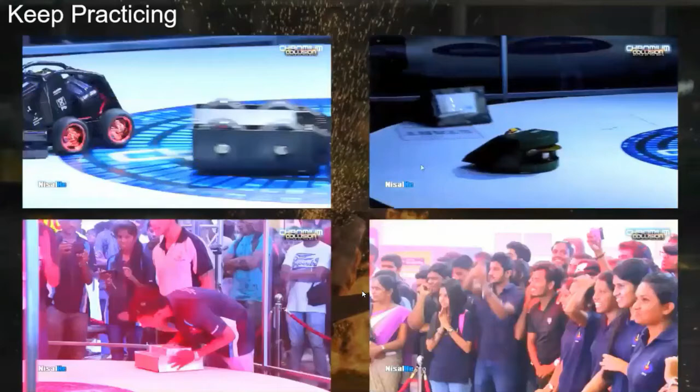What parts should be renewed - you won't know this kind of information if you are not practicing very well. So my advice is to practice before the day of the BattleBot competition.